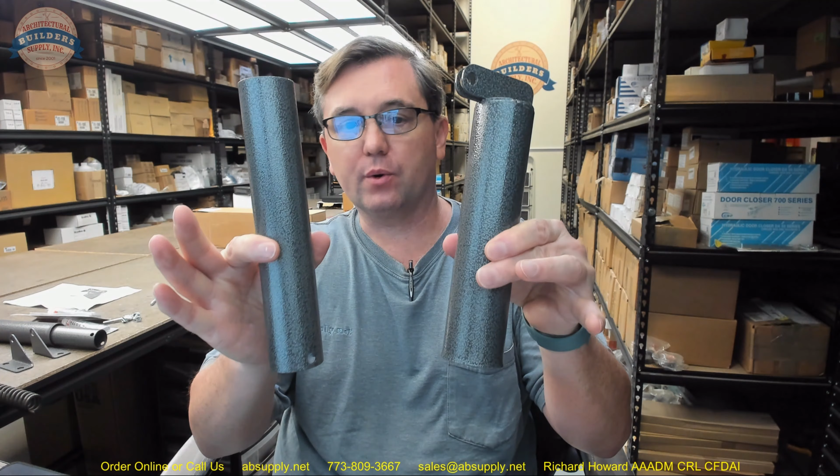Hello, my name is Rich Howard, owner of Architectural Builder Supply, and this video is to bring you a closer look at the JL Industries. This is their part number RHGIZ B004 shock and spring assembly.

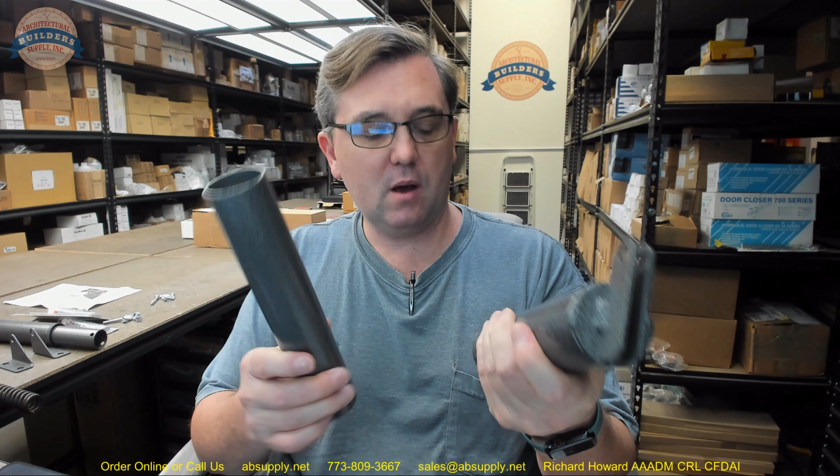This is a modern or current shock and spring assembly. This is going to be used in applications where you're dealing with what JL Industries would call a Generation 3 roof hatch, not the current generation. That current generation is called the Diamond series.

Where this shock is going to show up on different roof hatches, we don't know exactly. We don't have a master list that says the RHGIZ B004. By the way, this video is on the B004 and the B002. The only difference between them is that the 004 is a single shock unit, a single lifting mechanism. The 002 is a set of two.

I probably would have called them B001 and B002, but nonetheless, when you buy the B004, you're buying one unit, and the 002 if you need them on both sides. So because we don't really know exactly where they're going to be used, even though the factory says Generation 3 roof hatch, that doesn't kind of help some of us understand where we're going to locate it.

My intention of this video is to give you all of the visual and dimensional evidence of the item, and look at the installation instructions as well, so that you can determine if this is the proper item for your use. So here we go with a tour of the product.

Overall height of the tube, the top tube is 9 inch. To the top of the mounting bracket down is about 8 7/8. The bottom tube overall length about 8 9/16. A defining characteristic on the B002 and 004 is that a bolt will run through the bottom

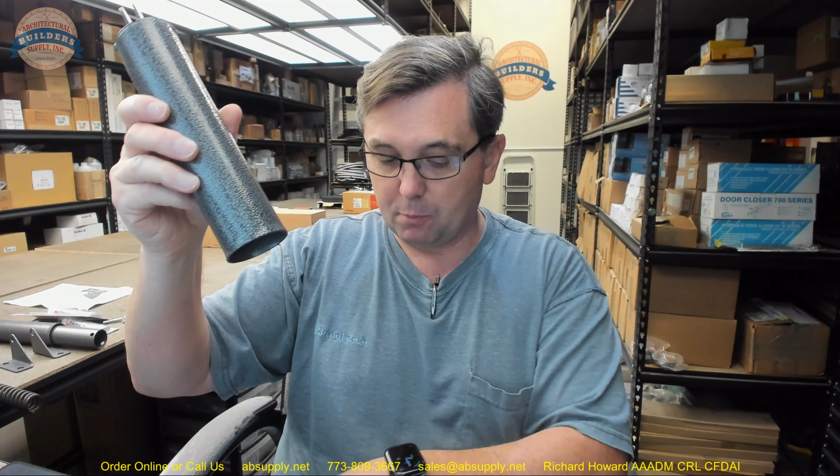of the tube into its mounting bracket in the sidewall. This doesn't have a welded on foot, doesn't clip into something, it just has a bolt that goes through. That will be a defining characteristic. This also has a flared end on the top telescoping tube to facilitate functionality.

If these pieces are out, separated a little bit, they want them with those flared ends to be more easily coaxed into position as a result of that flared out end that you see there.

Another common question is, what's the outside diameter of the tubes? Let's take those dimensions now. The upper tube is 1.884 on the diameter of the upper tube. The lower tube is 1.638. 1.638 is the diameter on the lower tube.

Now let's continue on. Here's the business end, obviously, of the entire, our honored guest of this dinner party, I suppose. Overall length of the spring itself looks like it's about 15 3/4. Because customers will call and say, yeah, my spring is so-and-so length. Okay, who's the manufacturer of the roof hatch? I have no idea.

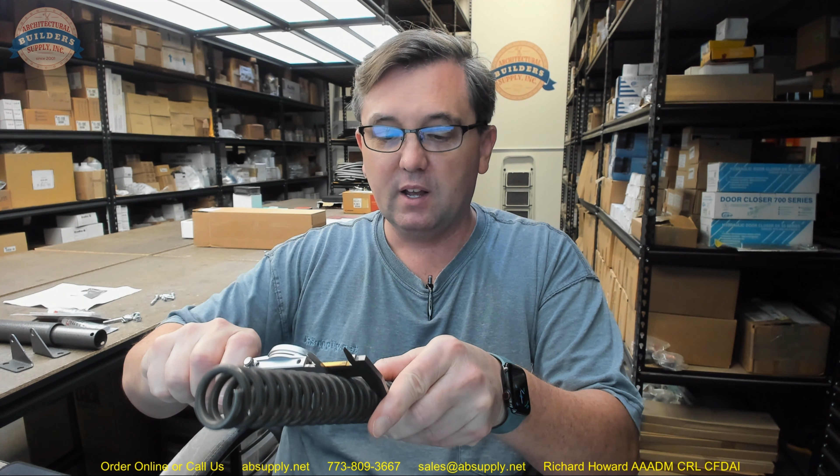Well, there's lots of springs out there, but these dimensions will hopefully allow you to determine whose it is. An outside diameter of the spring would be 1.245, and then a coil diameter of the spring itself, 0.191 diameter. Okay, now continuing on, you're going to get your upper bracket.

Now there is one of each hand here because this kit is literally the B002. When you order the B004, you're likely going to get the lifting mechanism that's going to be on the left side when you face the roof hatch. If for some reason you want to buy one lifting mechanism and you want to be sure you get the right bracket, I would definitely include that information in the comment field. When you're on the roof facing the hatch and it's open, the left is on the left and the right's on the right. So that's how you'll know.

The bracket, overall length, about 2 7/8. Overall depth, about 1.5 inches. Overall height of the bracket, about 2 1/4. Center line of that hole to the bottom of the base, about 1 13/16 inches. Center line of these mounting screws appears to be right at about 2 inch. Okay, those are the two brackets.

After that, there's not much to go over. You are going to get your 2 bolts, hex cap bolts, thread forming hex cap bolts to get that mounted to the underside of the lid. You are going to get your nylon lock nut and the hex cap screw to allow you to make this connection.

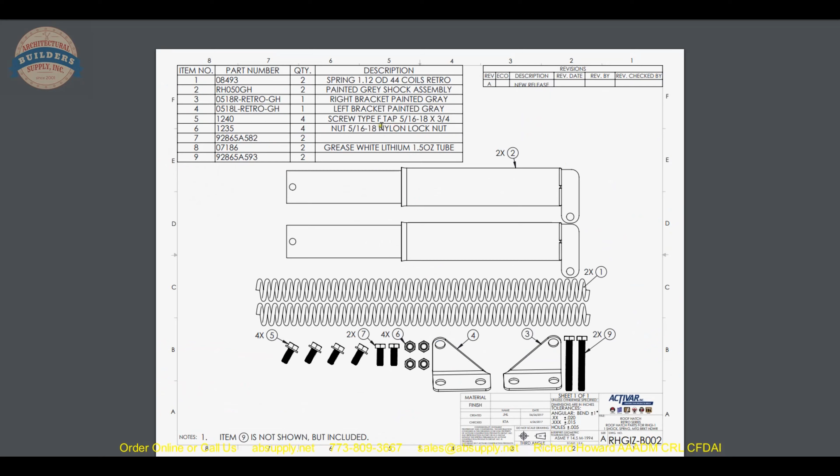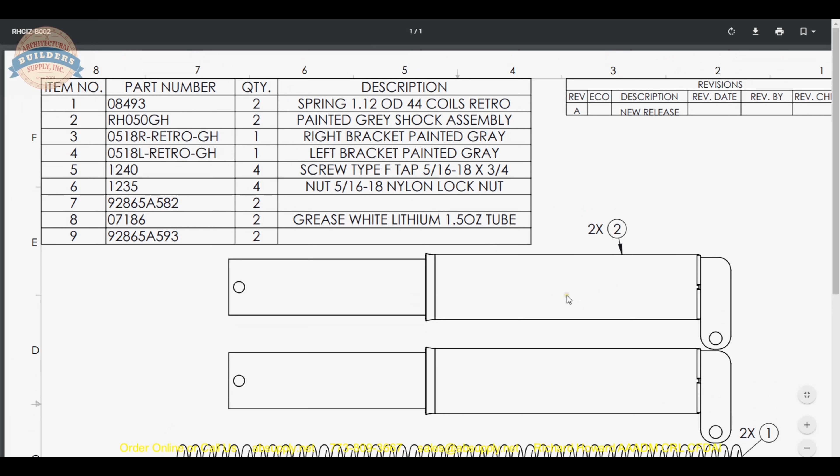This is the B002, and this would be a parts drawing for the 002 variant, where you're going to get 2 springs, upper and lower tubes, all detailed here, gray hammered paint, hammer tone I think they call it, right bracket, left bracket. Your bolts are listed there as well.

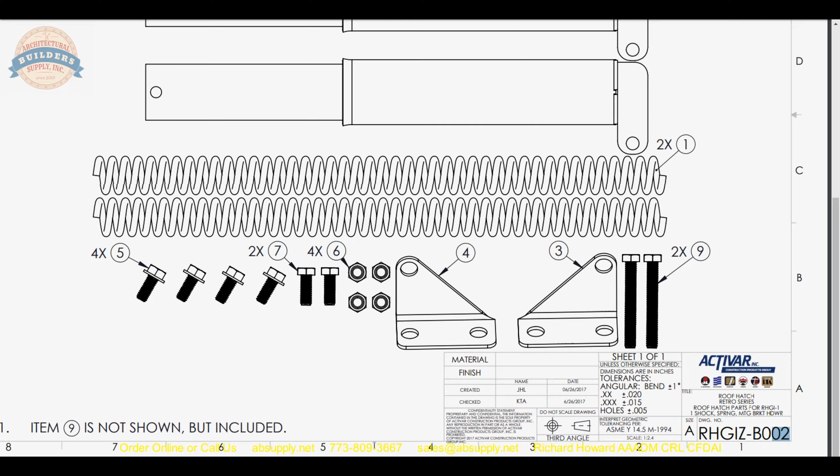That's everything. So when you buy a set of 2, you're going to get everything on here. Now they're included with the packaging, but there is also a link to the installation instructions, and this will allow us to go over the installation procedure. Scrolling through, let's go through it.

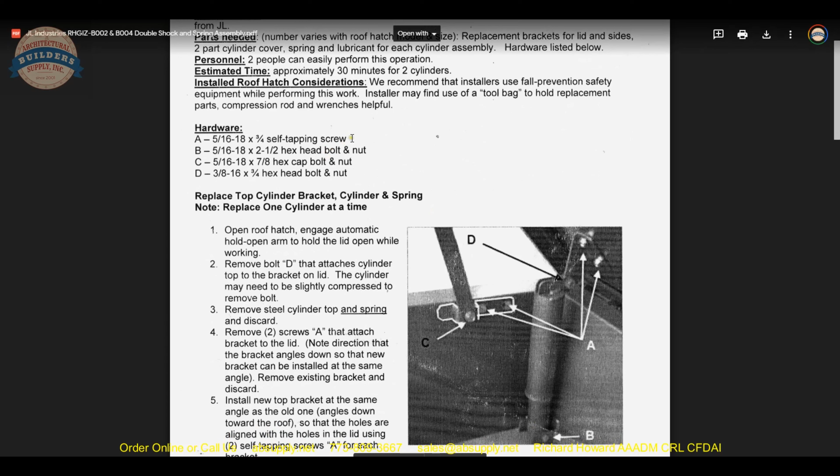So, seeing as how this does not include the compression rod assembly, let's continue on. Installed. This is a 2-person job, 30-minute job, they say.

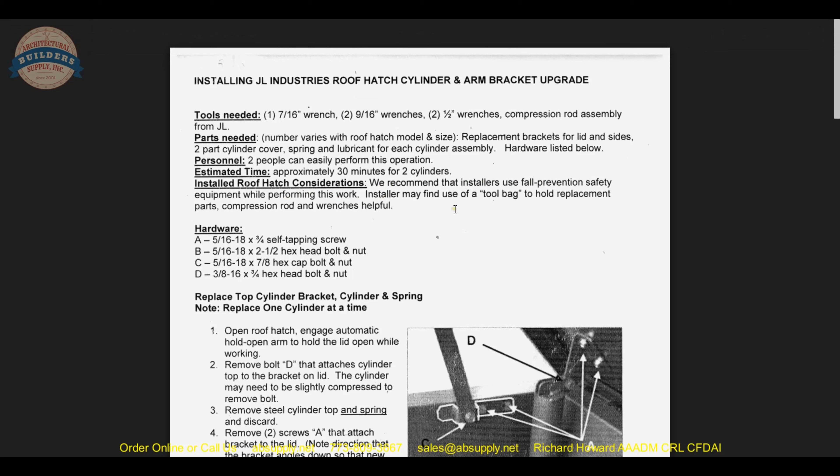Installed roof hatch considerations: we recommend installers use fall-prevention safety equipment while performing this work. Installer may find use of a tool bag to hold replacement parts, compression rod, and wrenches helpful. Okay, hardware, you've got your bolts listed here.

So replace top cylinder bracket, cylinder and spring. Note, do them one at a time. Yeah, that would make sense. It'll at least help control where the lid is.

Open the roof hatch, engage the automatic hold open arm, remove the D that attaches the cylinder top to the bracket on the lid. So you're going to remove your bolts there. Remove steel cylinder top and spring and discard.

Remove the 2 screws in A. This would be wire. Okay, so don't remove these 2 A screws. That's the hold open bracket. Well, actually, yeah, do remove these 2 A screws. These are what they're talking about.

Notice that the bracket is tapered towards the back wall, or down, when it is to be installed correctly. Install the new top bracket.

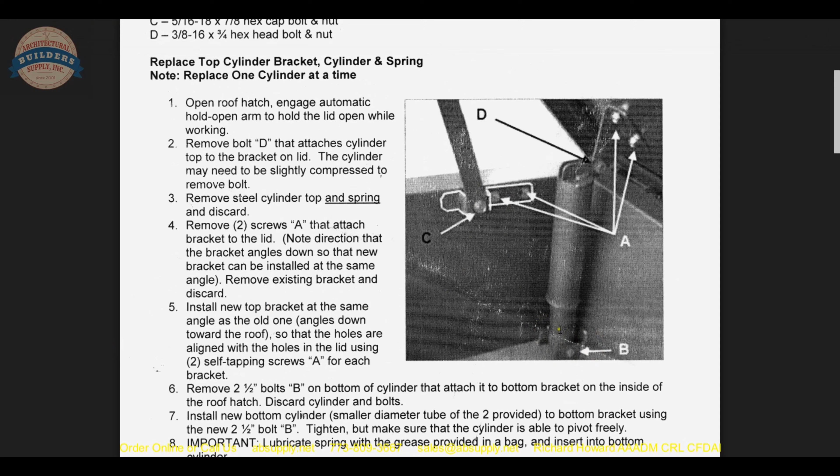Remove the B bolt down at the bottom. That will allow you to get that lower tube off. Install the new bottom cylinder.

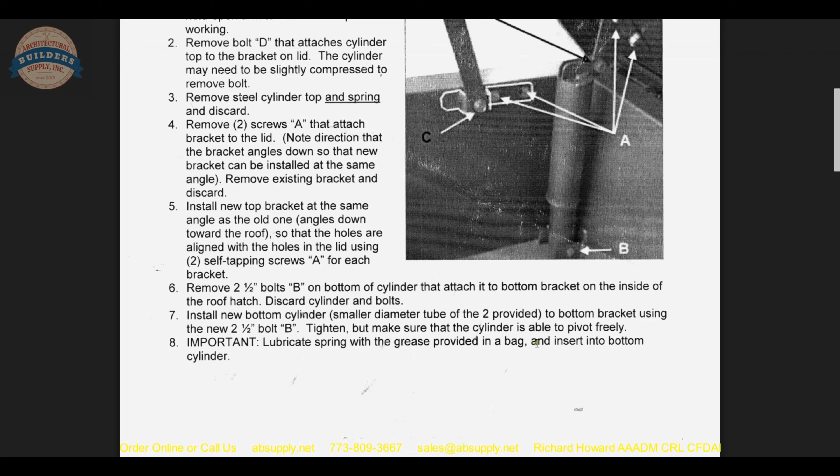Smaller diameter of the 2 tubes naturally to bottom bracket, using the new bolts that are provided. Tighten, make sure that the cylinder is able to pivot freely, and lubricate spring with the grease provided in the bag and insert into bottom cylinder. Now, place new cylinder top, larger diameter, over spring and bottom cylinder.

Raise to vertical position. This is where this compression tool comes into play, because what you need to do is get the assembly compressed to where you can get it bolted together.

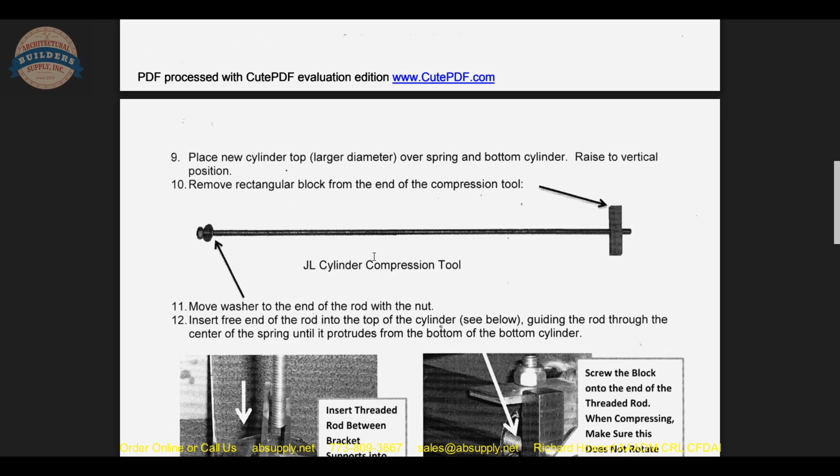So remove rectangular block from the end of the compression tool. If you're doing this work, we're going to add a link below this video to the JL cylinder compression tool. It's not included with this set. It's included with other sets, and why it's not with this, I don't know. But the installation instructions clearly require the ability to compress this cylinder. So remove the long block.

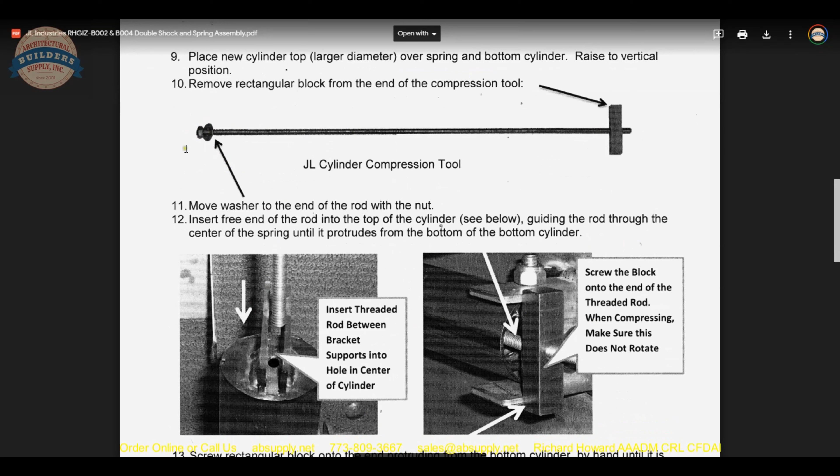The head, the threaded rod has a washer. This is a nut that's just been tack welded on, and you'll insert all of this assembly down into the top tube, through the spring, down and come out of the bottom tube, and that's where you will then attach your block again. At that point, you will start to tighten that so you can draw the spring into a compressed state to get it to line up with your lid bracket.

At that point, you'll attach the lid bracket. And then I think the installation instruction goes on to say replace side brackets for hold open. Yeah, there are no side brackets included here. I'm not sure why they're referring to the hold open arm assembly at all.

So the installation is simple and straightforward, and once you have it bolted at the top, you will then unscrew your compression tool and save it, would be my recommendation, so that you can use it in the future. I cannot think of an elegant way to compress that spring at all, unless you had an incredibly large C-clamp. And even at that point, you'd want to use a block of wood top and bottom.

Now, the 004 is here, the 002 is here. It's a better drawing, or at least it's a photograph of what's included in the 002. The B002 and the B004 replace the A004 as seen here, which is discontinued.

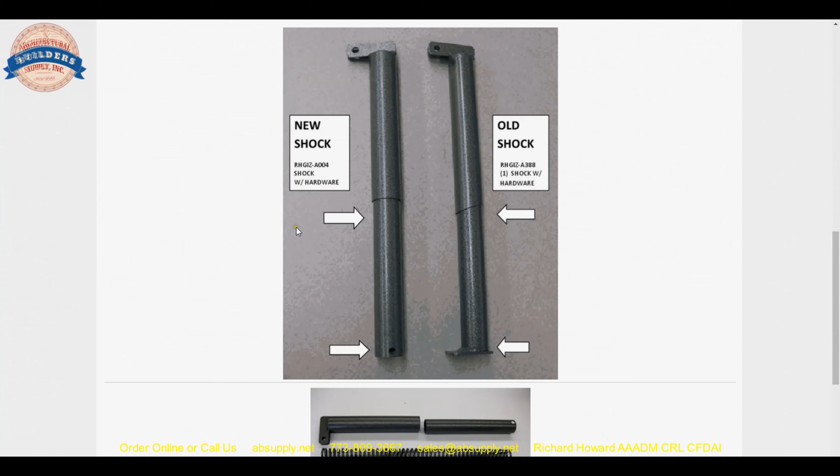What I recall about this is that it was not flared here at the top. It has been long discontinued, and it might have been a replacement for the A388.

So they, JL Industries and all roof hatch manufacturers, are a bit cagey about having that information portrayed up front in terms of here's the lifting mechanism you need. But the point of this video is to help dispel and eliminate the guesswork in terms of what you might need.

So that's the installation instructions. I'm going to get from the factory the cost for that compression tool and get it added and linked to in both of these items.

What I wanted to show was going to be the current version, which is the... oh, here it is. RHD, Roof Hatch Diamond. RHD-KIT Retro SPR-G1. This is the new style.

And according to the manufacturer, it's backwards compatible. It will replace all the old ones. This obviously should say B002 as well.

And that will include this updated version of the compression tool. Here, they have the compression tool here as well, plus a set of 2 springs. They've got a helper spring that's included, and I don't believe it's obligatory to use them both, but I believe it plays the role of a helper spring, should it be necessary.